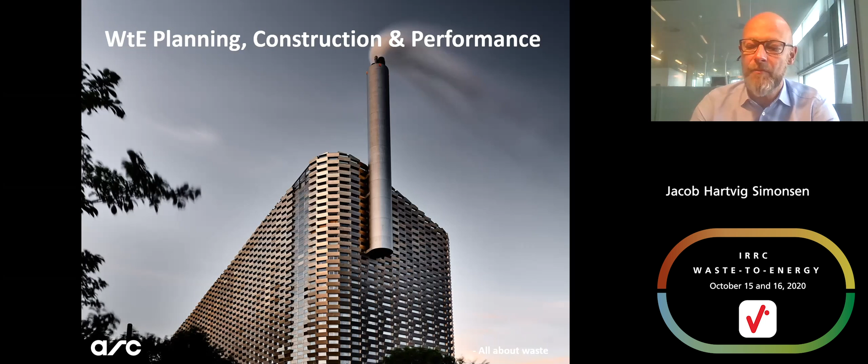ARC in Denmark is not only a waste-to-energy facility. We have a wide range of other activities as well, ranging from landfill to sorting plant. We actually also collect the household and recyclable waste in all our 5 municipalities that are the owners of ARC.

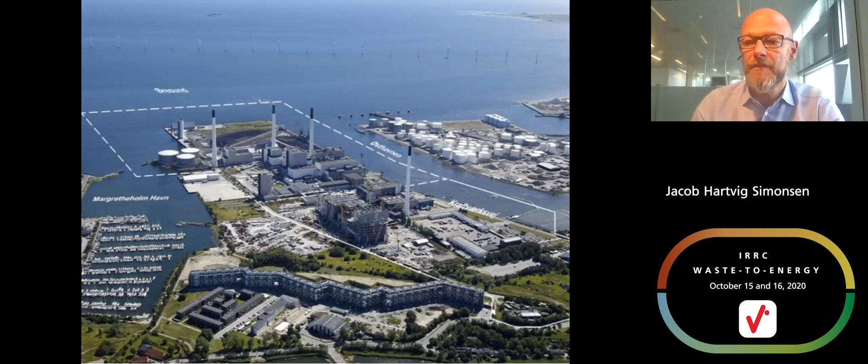Right now, what you see here in your picture is actually the start of building ARC, and here you have the whole energy peninsula, as we call it, and that is the motorway. From the old picture, you can see that we were on the outskirts, but right down here is actually residential areas. And this is also the main explanation of why ARC looks like it does today. Because we had the clarity that the city is moving closer and closer to the waste-to-energy facility. And in the next 30 years, we'll be even closer.

If we were to build ARC on the outskirts of the city, we would have to endure very large costs to connect to the district heating network. And therefore, it was decided to build it where it was, on the highway to the district heating system. But at the same time, having this idea that the residential areas come closer, we also looked into how can we then have the license to operate? How can we not end up in a situation where it will be not in my backyard?

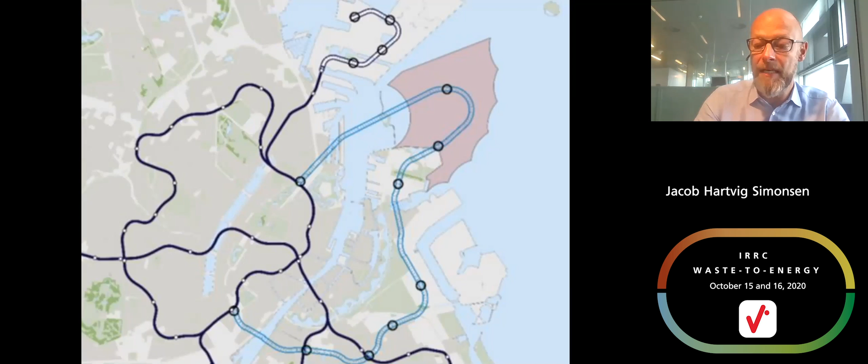This is actually the future planned metro lines in Copenhagen. This is the artificial island, and ARC is out here. That is to say that we'll be on the main metro line as well. So we will be an integrated part of Copenhagen city.

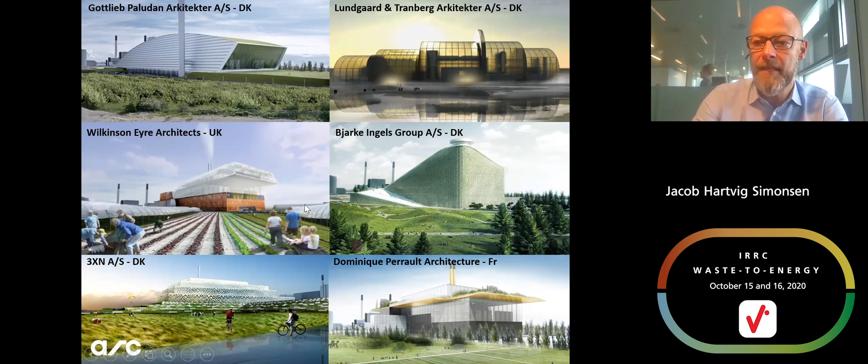That is also why, when we tendered out the architectural competition for ARC, we wanted to have a bid on how we could integrate the waste-to-energy facility in the city. We wanted to open up ourselves and invite the city to the plant instead of making a big fence with barbed wire and keeping the residents out. These are actually the 6 bids that came in, and it was the Bjarke Ingels Group who won the tender, and the rest is more or less history.

It is an absolutely ridiculous idea to build a ski slope on a power plant, on a heater, on a furnace, but it is still at the same time an absolutely brilliant idea. It has definitely not been easy, but it has been worth the while. I think it is safe to say that making recreational facilities at our waste-to-energy plant has created a very great platform for acceptance of the plant in the city.

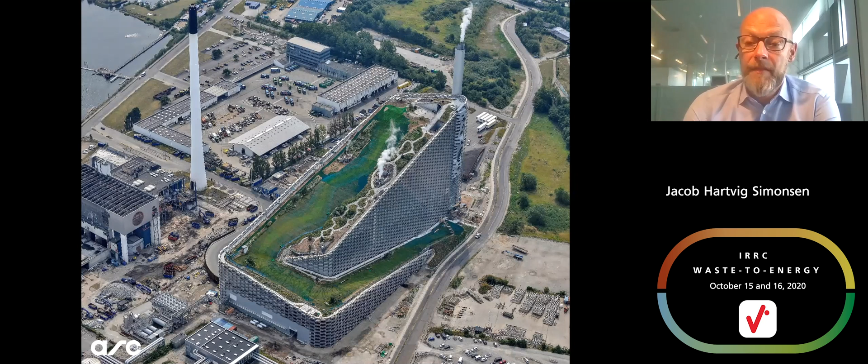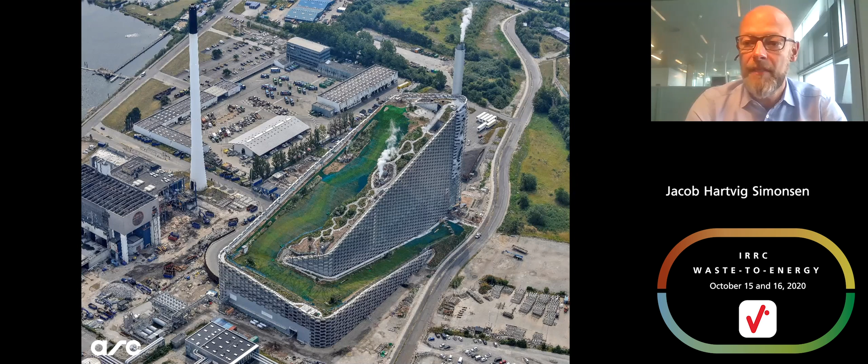The ski slope at ARC is actually placed in a totally outside foundation, because under Danish legislation, and I think it is like this in most of the world, we cannot use the heat consumers' or the waste producers' money to have recreational activities. So we have put this in a private foundation, and they have done their fundraising to finance the recreational activities.

And I think it has proven to be a very good idea to have a private operator on the roof. It is not easy. You need good contracts and so on, but it has been a great advantage for us as a municipal-owned public entity to have this cooperation.

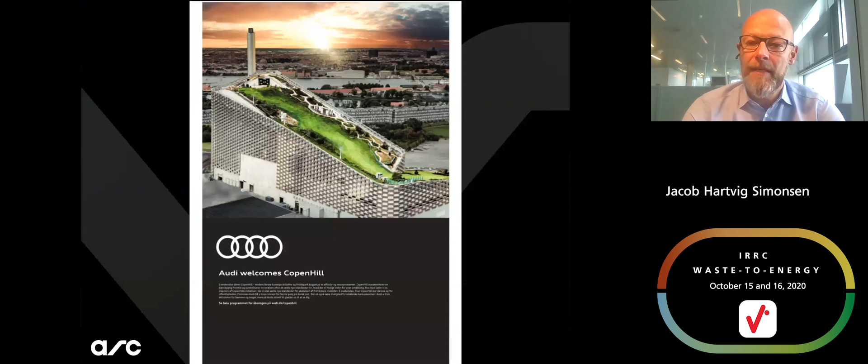This was in the Danish newspaper. We have not used a single cent for this, sponsored by Audi, because they have interest in the recreational facilities. This is actually the building next to the town hall square. As a public company, we would never ever be able to advertise in this manner. But of course, private money is welcome to do whatever they like.

We've had a lot of focus from the sporting community, the running community, and now the climbing community is starting to come up, and of course also the skiing community. At our very top, the private operator has a small champagne bar. And I'm just putting it to you, as public companies, will you ever be able to have a champagne bar on top? We would definitely not in Denmark.

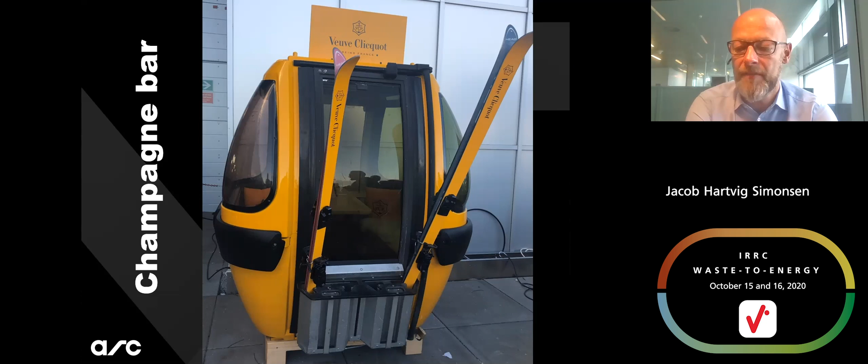If this was a public operation to run the recreational facilities, we would have all the tabloid papers come running and say, "Are you really able to fund this?" And of course, we're not. This is not our money. This is the private funds' money and the operators' money to make a business out of the recreational facilities.

So a little bit about our waste management plant. How does it actually operate, and what kind of values do we actually get from running the plant? I think it is safe to say that we have one of the very best environmental performances in the world. We also have a very, very high energy efficiency.

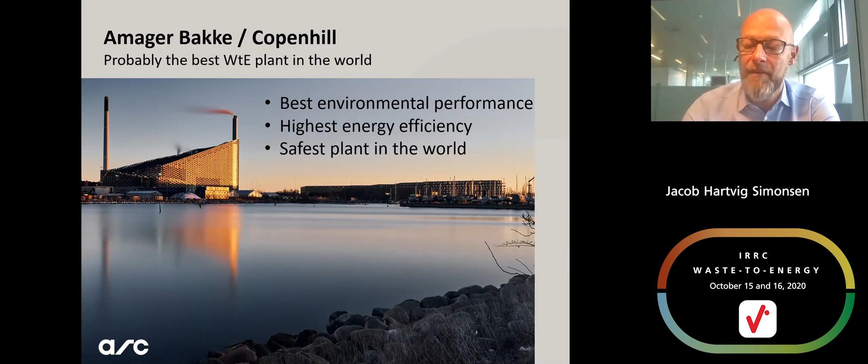And by far, I think it's safe to say that we are the safest plant in the world. And of course, we are the safest plant because we have skiing guests on the roof. And therefore, it is not an option to lift the roof if the worst things should happen and you have a problem in the boiler room.

We started operations in 2017, and it has not been easy to start up the operations. But last year, we received 477,000 tons of waste. We had a little bit in the bunker, so we treated 483,000 tons, and that actually supplies the heat need for 77,000 households, and the electricity need for 38,000 households. So it is quite a bit, and it is also a key to the success that we are very well integrated in the district heating network in the greater Copenhagen area.

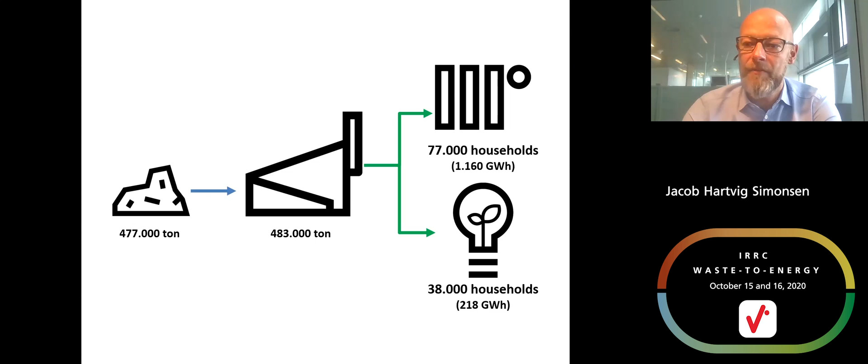I think we are lucky in the way that we have probably the widest district heating network in the world, extending all the way from the municipality of Copenhagen to Roskilde, more than 40 kilometers. And there's a great need of district heating in Denmark. So all that we actually produce, we can put into the district heating network, and therefore we are also able to make a more sound business case.

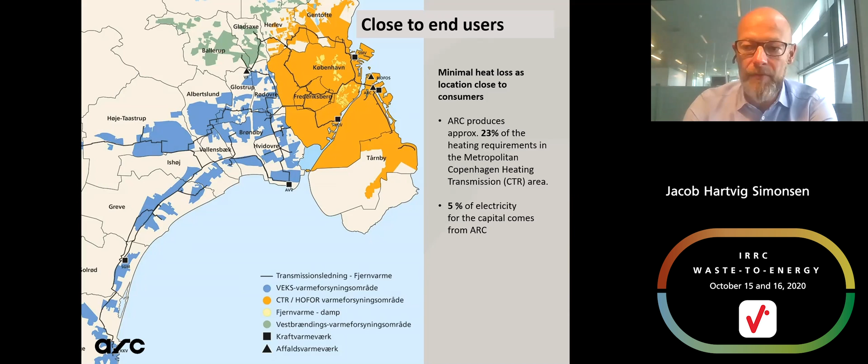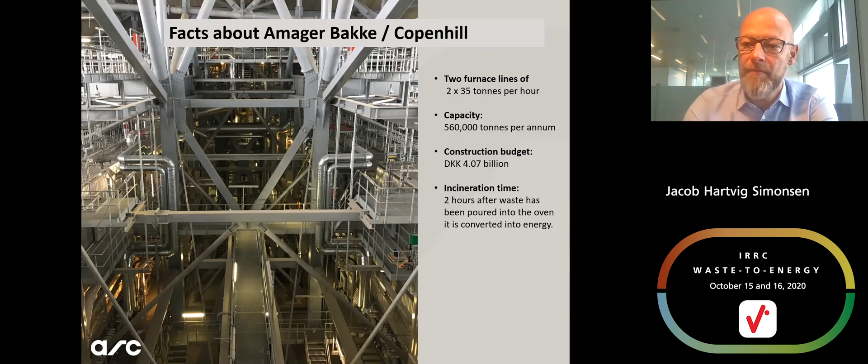We have two lines operating at 35 tons each, so 70 tons an hour, a max capacity of 560,000 tons on a yearly basis. This has not been cheap. It is about 4 billion Danish kroner, and it is definitely a lot of money. And we can only do that because we have a long-term financing plan that will keep us in business for the next 30 years, hopefully.

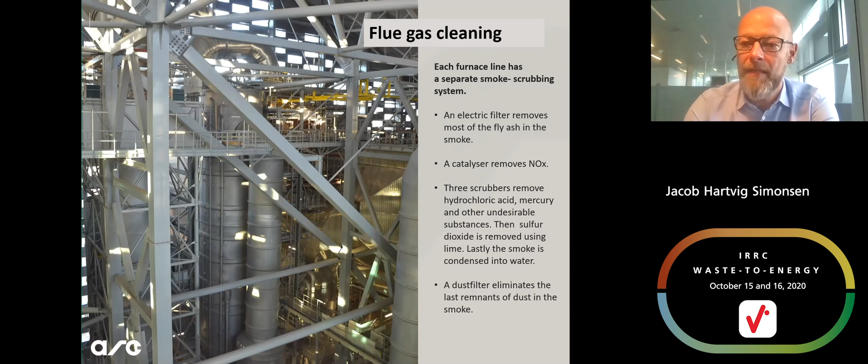We have a lot of cleaning technologies, as I'm sure all of you running waste to energy facilities are familiar with. It is more than maybe 2 soccer fields of cleaning equipment. The main part of the plant is catalytic converters, dust filters, electrofilters, scrubbers, and so on. And they are working quite well.

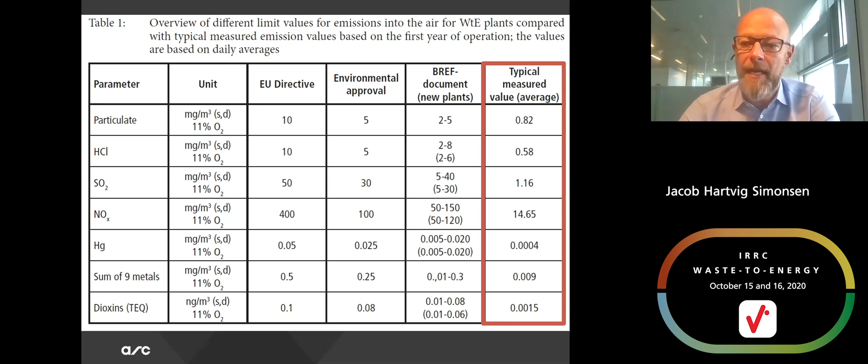Here you have a table saying what are the EU directive emission limit values, and what values do we actually have in our environmental approval. And the new BREF values are here. And what you can actually see in this red square is our values that we actually deliver, measured values from our production. And as you can see, they are far, far below the emission limit values in the EU directive.

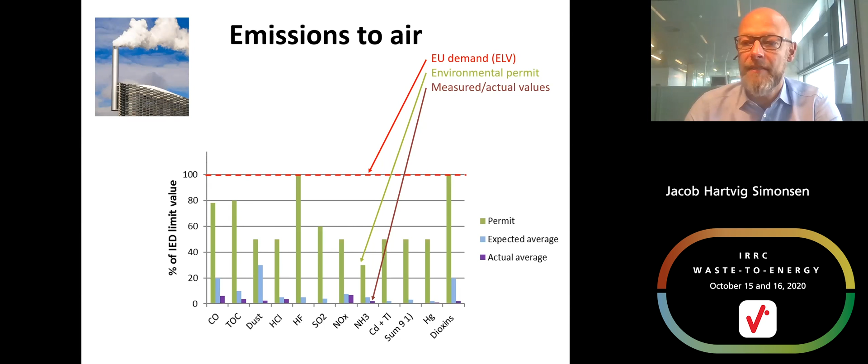If you put it on an index scale, so to say, then up here you have the EU emission limit values, and you have the values in our environmental permit. And down here, you actually have the values that we produce and deliver. That is to say that the plant is running very well, and of course, that also gives the basis of why we are being accepted in the community as a sound way of treating waste.

We also have emissions to water. We are actually discharging water directly into the sea. These are the emission limit values you have up here, the values in the environmental permit, and the drinking water limit values. That is to say that our permit and what we actually emit is at many different parameters below the drinking water limit values, and that is quite something.

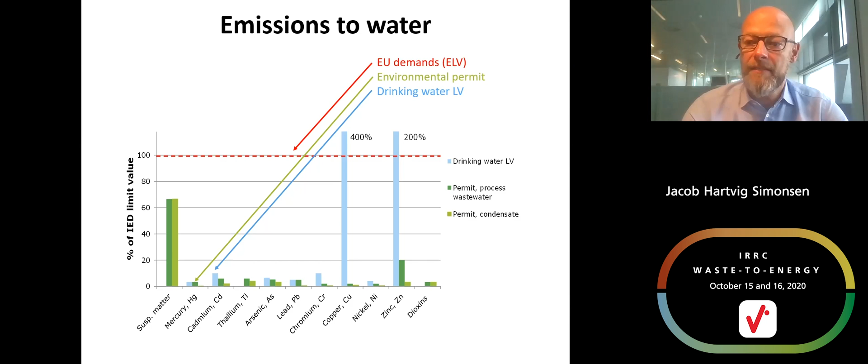If you look to the NOx, we have a catalytic converter, and we are delivering extremely low NOx values. If you compare it, the amount of NOx that we emit to the air on a yearly basis is the same as 2 cruise ships turning around in Copenhagen harbor. Cruise ships emit a lot of NOx. That's not so good. And on the other hand, we emit very, very little.

In Denmark, we have a goal to be climate neutral. This is our Prime Minister presenting the goal when she took office not so long ago, that we would reduce greenhouse gas emissions by 70% in 2030. And the municipality of Copenhagen, which is our biggest owner, is also very ambitious regarding the climate goals. They actually have goals to make Copenhagen the first climate neutral city in the world by 2025. And of course, they are also looking to ARC to see how we can help them.

And therefore, we are at the moment working with a carbon capture project. This will also, I think, in the long run, increase our standing with the local community, saying that we can burn the residual part of waste that cannot be recycled in a very environmentally friendly way. Right now, we are trying. We have funding to make a pilot project, and we are hoping to make a full-scale project in the years to come. Of course, if we take out the fossil element of what we are burning, about 160,000 tons a year, we will be climate neutral.